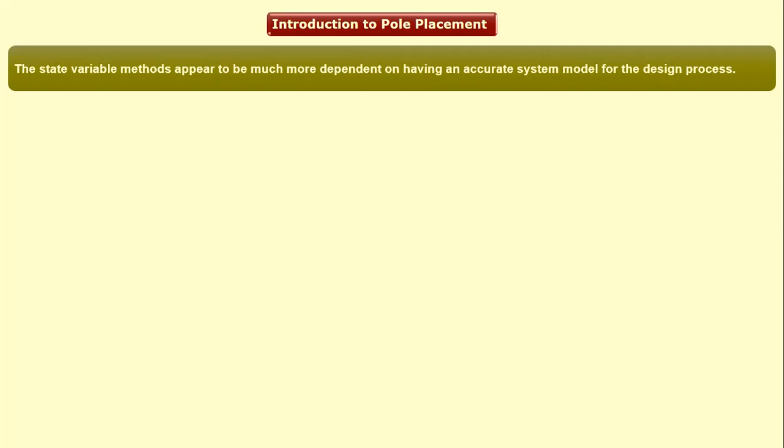Like the state variable method, basically, it needs to have the accurate system model. If we want to do analysis through state space, we need to have the accurate system model, because we are talking about the states of the system. We need to know the state of the system, every state of the system. So to have that, we need to have the accurate system model.

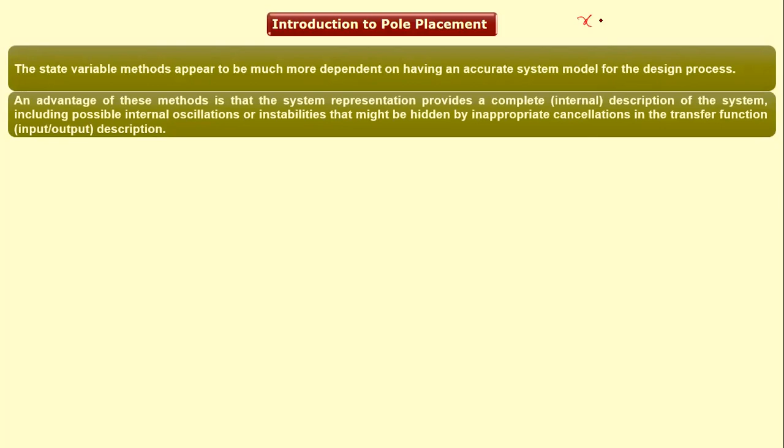Now, the advantage of state space approach or state variable method is that it depends upon the state of the system. Like for any given discrete time system, the state equation can be written as x(k+1) = Fx(k) + Gu(k), and the output equation can be written as y(k) = Cx(k) + Du(k).

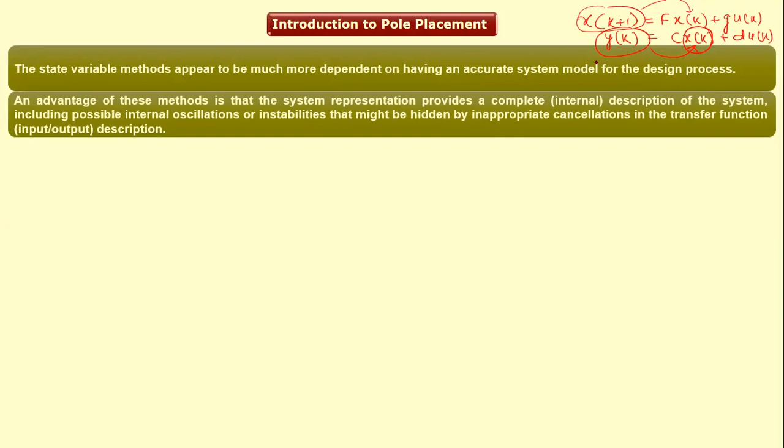So in this equation, if you see, the output of the system depends upon the state of the system. State, in a layman's statement, is the internal description of the system. So if we do analysis of a given system through state space approach or through state variable method, because the output, or the dynamics of the system, depends upon the state of the system, that means a state variable method gives us a representation, or insight, of the internal description of the system.

Now, when we design the controllers using state variable technique, the most important point about this technique is that we can use state variable method to design the controller for a MIMO system. It is very convenient and easy to use a state variable method to design a controller for a multi-variable system, or multiple input, multiple output system.

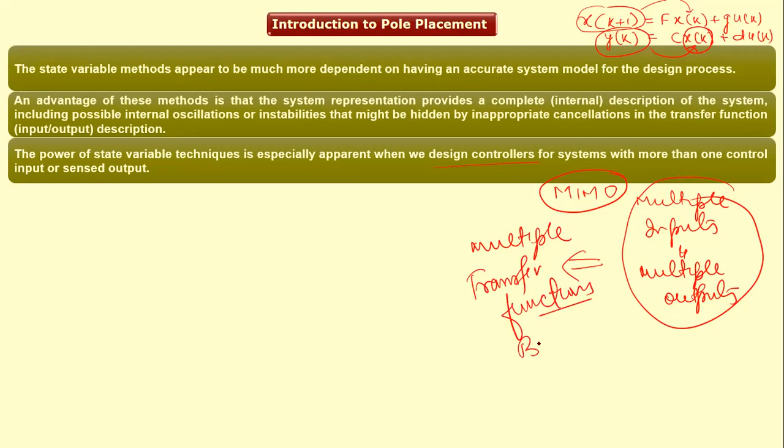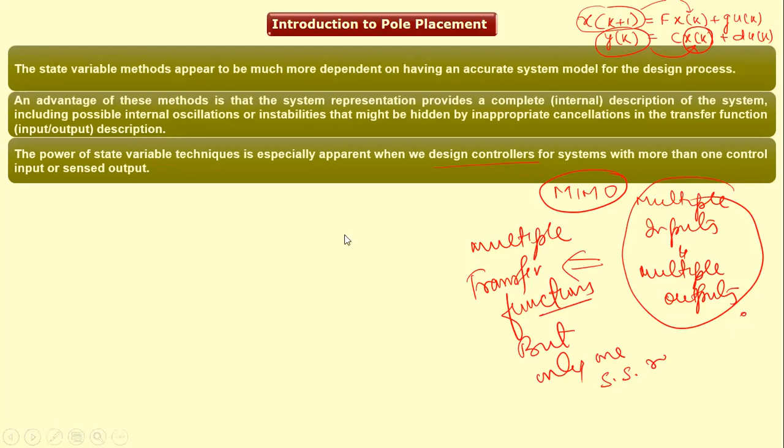If we compare this with the transfer function approach, if we have multiple inputs and multiple outputs, we will be having multiple transfer functions. But there will be only one state space representation, and that is why this method is more convenient as compared to transfer function approach as far as multivariable systems are concerned.

So in this particular chapter, we will understand how we can design the control system or the controller for a state space model using the pole placement technique or pole assignment technique.

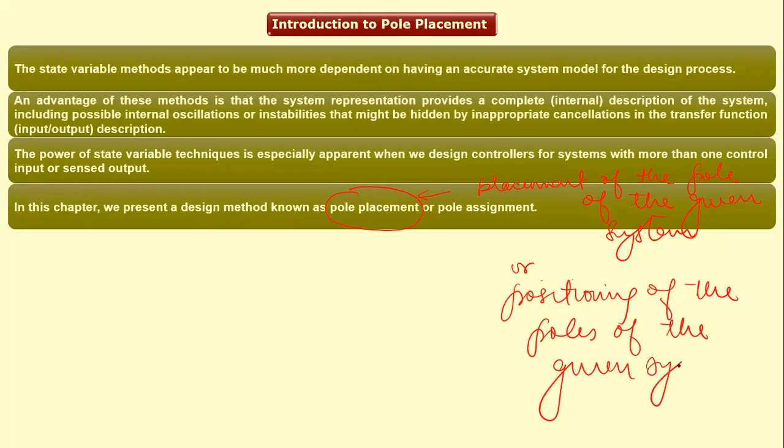Now, what is pole placement? As you can make out from this word, it is the placement of the poles of the given system, or you can say positioning of the poles of the given system. This particular method is almost similar to the root locus method.

In root locus method, we can design the controller using root locus method also, wherein we can have the preferred or desired locations of the closed loop poles. However, in pole placement technique, we can position all the closed loop poles of the system at the desired locations. However, in root locus method, only the dominant poles are placed at the desired location.

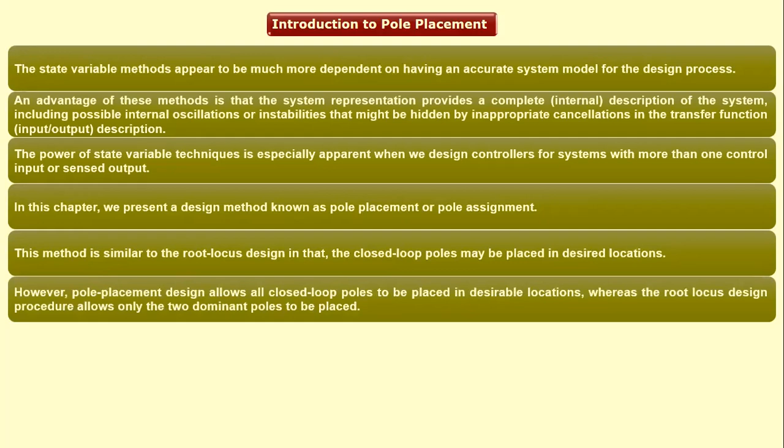Now, if we want all the closed loop poles to be placed at the desired location, in that case, we need to measure all the states of the system. We need to have the information about all the states of the system.

So what is pole placement method? A pole placement method is basically a method which is used to design the control system or controller so that the closed loop poles of the plant or the system can be positioned, can be located at the desired location in the S-plane as far as continuous time systems are concerned, and in the Z-plane as far as discrete time systems are concerned. So pole placement means the placement of poles of the system - closed loop poles.

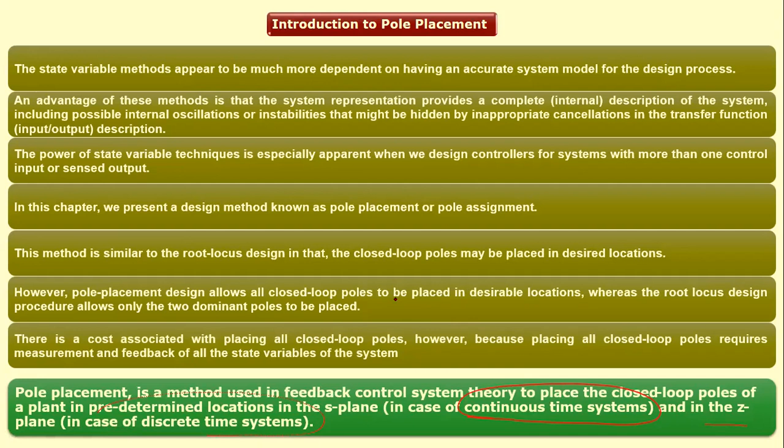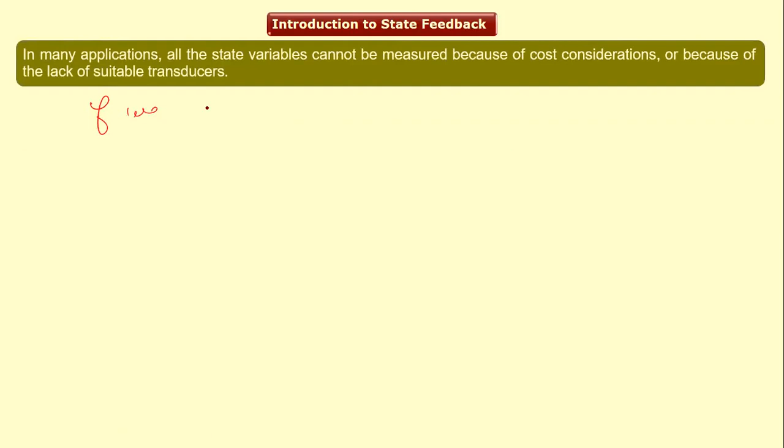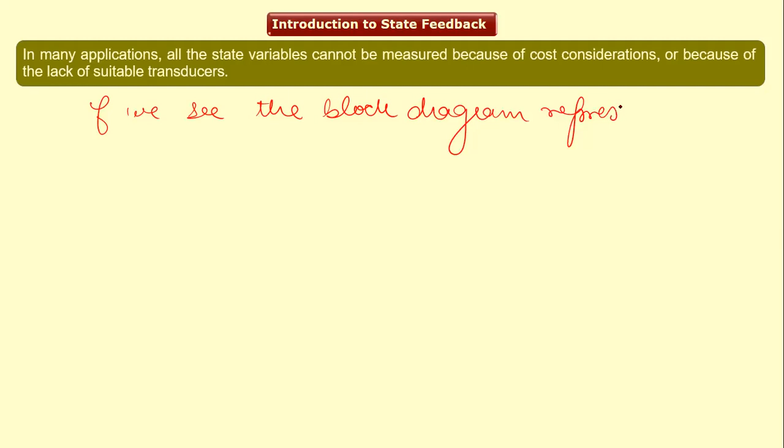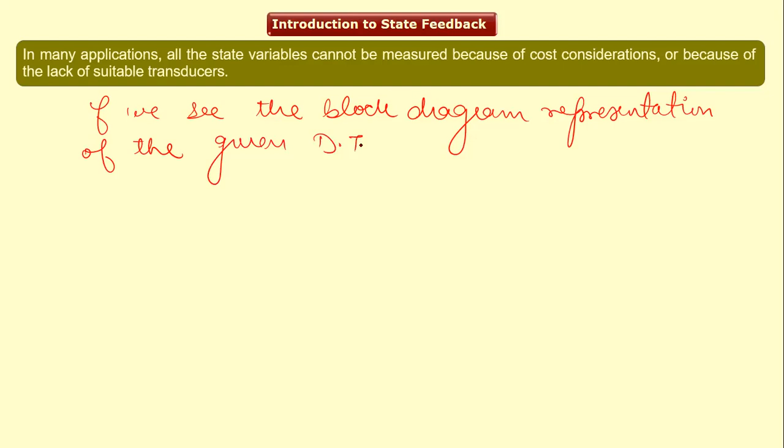Now then, what is state feedback? If we see the block diagram representation of the given discrete time system, it is given by x(k+1) = Fx(k) + Gu(k), and the output is given by y(k) = Cx(k) + Du(k).

Now if we represent this through a block diagram, we have a delay element. The output of this is xk, and input here is xk plus 1. We feedback the state by multiplying this with matrix F, then we have a summing point here, and we multiply G here with uk. Then we multiply uk with D and xk with C, and add them to get the output yk. So this is the block diagram representation.

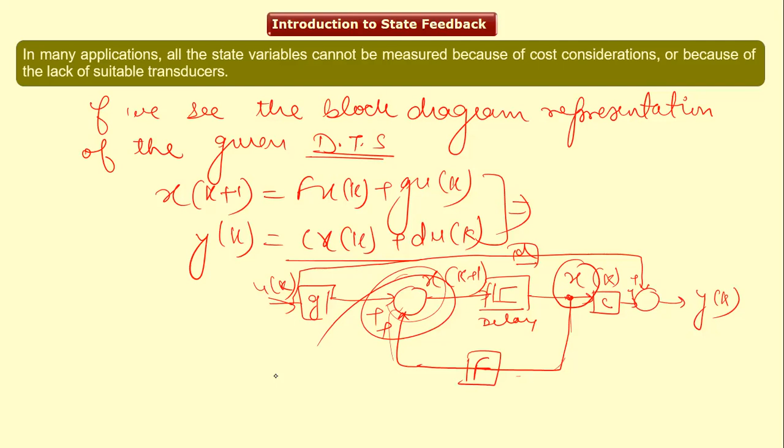Now if we see, we are feeding the state of the system back to the summing point. This is one basic thing, but we have some amendments, some modifications in this particular type of representation, so that we can have the desired locations of the closed loop poles of the given system.

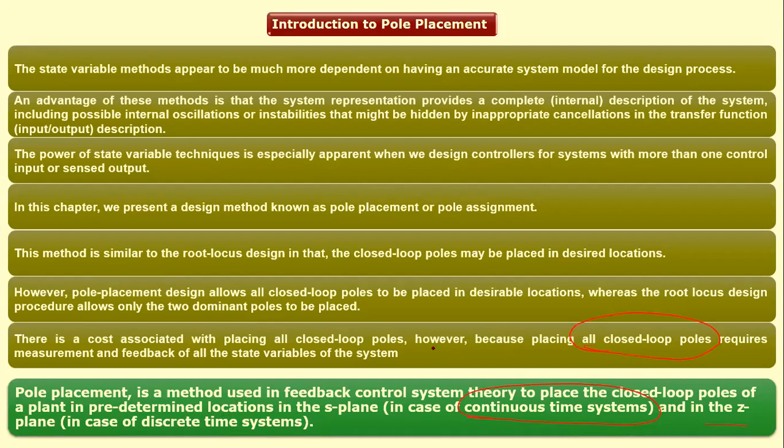So now, we need to locate all the closed loop poles on the desired locations in the Z plane in case of discrete time system.

Now, if we want to do this, we need to measure all the state variables of the given system. However, all the state variables of the system cannot be measured. There are various reasons behind it.

The reason is that if we want to measure every state of the system, we need to include more sophisticated measuring instruments, and the cost will increase. Also, we do not have the suitable transducers which can measure all the state variables of the system.

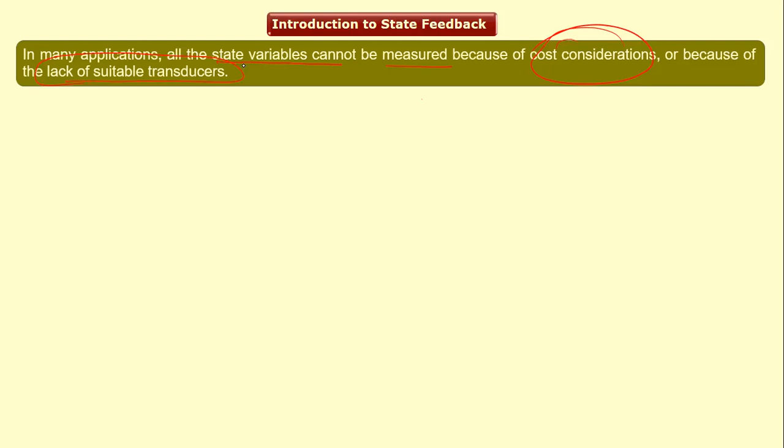Now in these cases, what do we do? Those state variables which we cannot measure need to be estimated. We can estimate from the behavior of the available states of the system the rest of the states which we cannot measure.

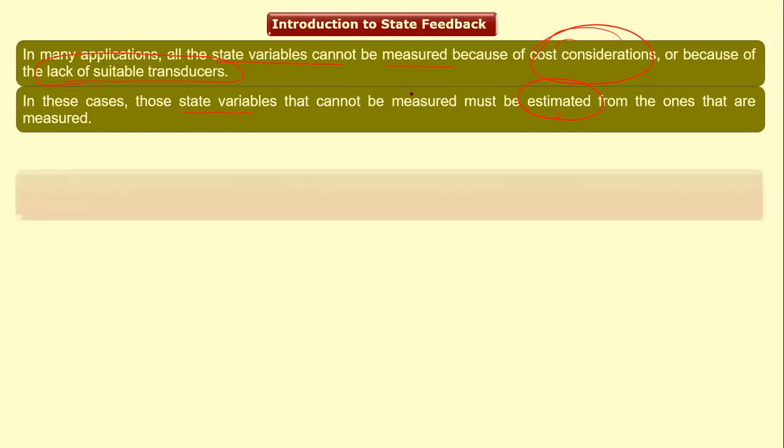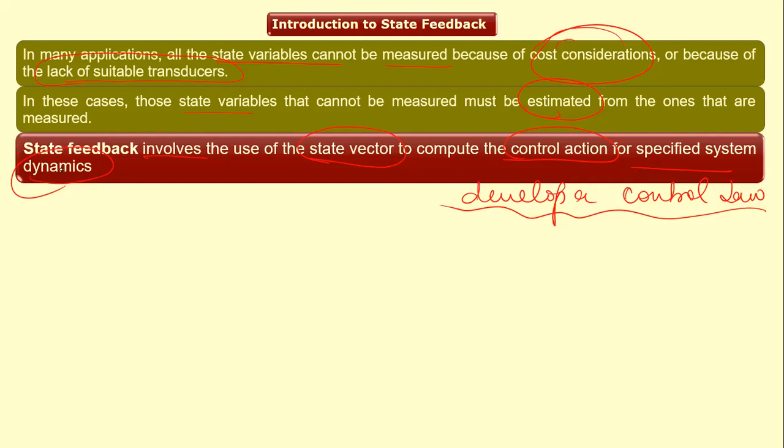Now, what is state feedback? State feedback is a method which involves the use of state vector so that we can compute a control action, or develop a control law for specified system dynamics. For a specific type of dynamics of the system, we can develop a state vector so that we can have a control law, or a controller for such type of system.

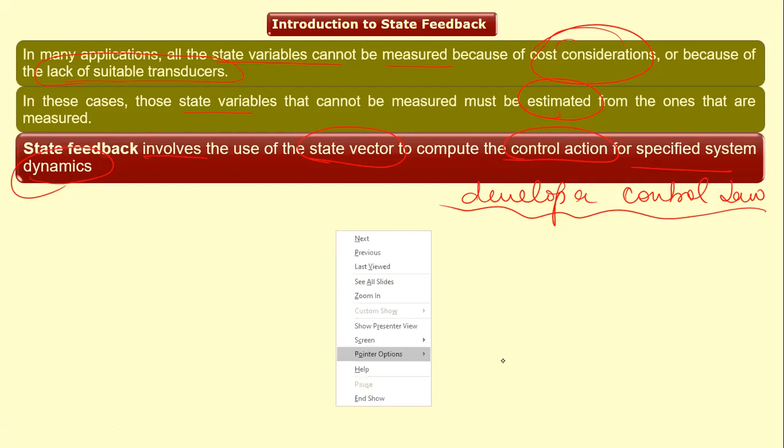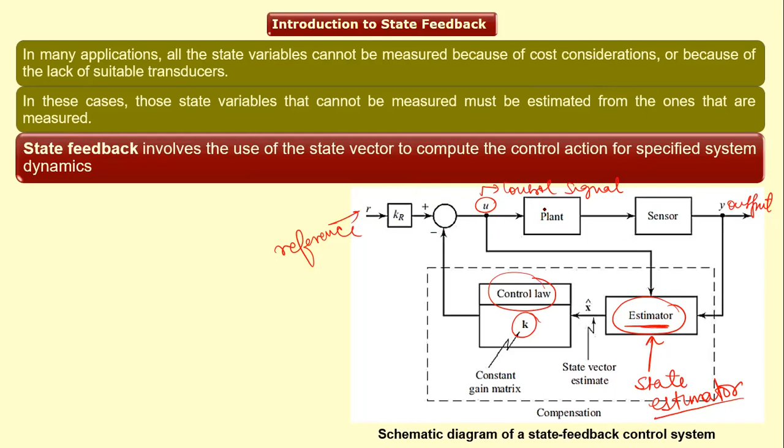So what do we have? We have a reference, we have a control signal, we have an output, we have an estimator. This is the very important part of the system. Then we develop a control law for this type of system based on the output or feedback given by the estimator. Compare the controller's output with the reference, and then we have a control signal. So this is how the state feedback control system works.

Now, how can we improve the stability of a system using state feedback? For any feedback system, the important aspect is that the stability of the control system needs to be ensured. The primary function is to make the system stable. This is one of the primary functions. There are various functions or objectives of a controller or control system, however, the primary function is to ensure stability.

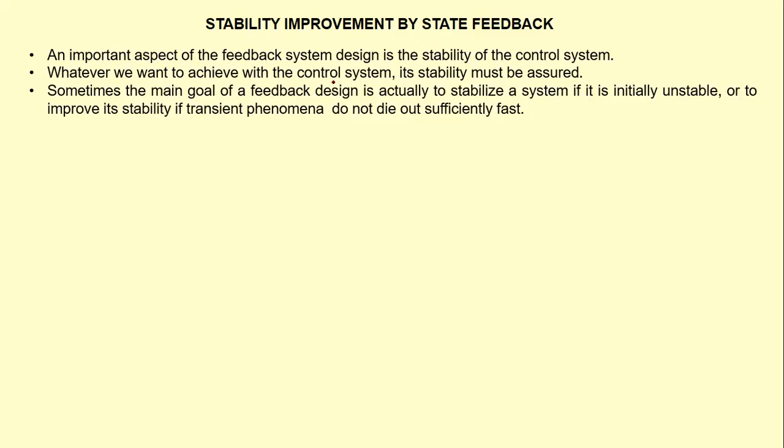Now, if we want to achieve stability through a control system, its stability should be assured. At times, while designing the feedback control system, our actual objective is to stabilize a system if it is initially unstable, or if it is initially stable, we can improve its stability or transient response. That means if our system is already open loop stable, we can improve the transient characteristics, steady state characteristics, or frequency characteristics of the given system by designing a suitable controller.

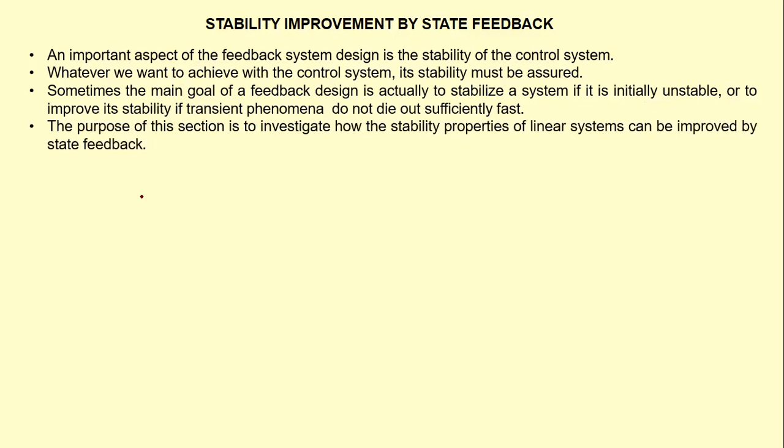Now in this particular section, we'll see how these stability properties of the linear system can be enhanced, can be improved, using state feedback.

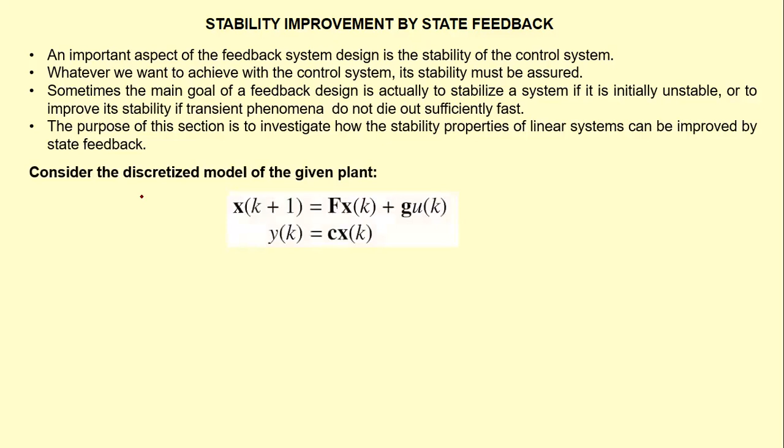Now for this, let us consider a discrete model of the plant, which is given by this equation. Let us say this equation is equation number 1 here, and we have all the matrices here. F is the state matrix, this is the input matrix, this is the output matrix.

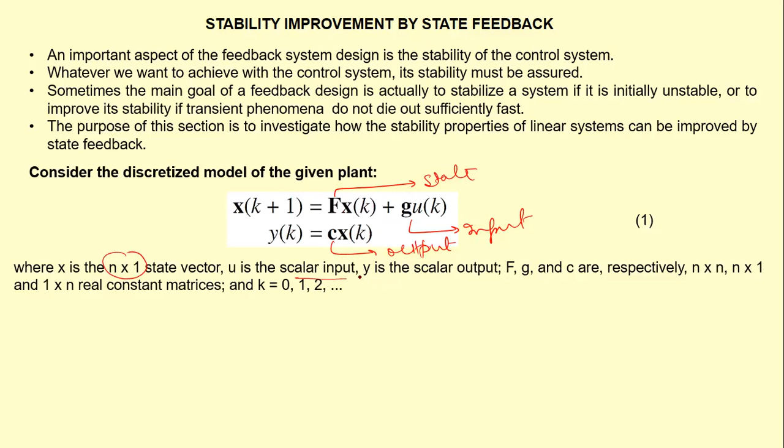xk is basically a state vector, uk is the scalar input, and yk is a scalar output. So this is a SISO system, right?

So now the design of the controller for the plant given by equation number 1 can be done in two steps. The first step is that we assume we have all the elements of the state vector at our disposal for feedback purposes, meaning we have measured all the state variables.

The next step is that we can design a state observer which can estimate the entire state vector.

This is what we have to do, because if we want all the closed loop poles of the given system to be placed at preferred locations in the Z plane, we must have all the state variables of the system. However, it is practically not possible to measure all the state variables of the system.

In that case, what do we do? We design the state observer, which acts as an estimator and estimates the entire state vector of the system.

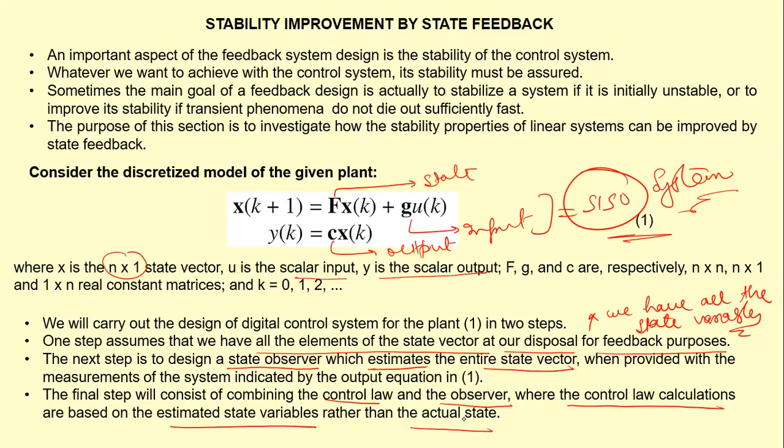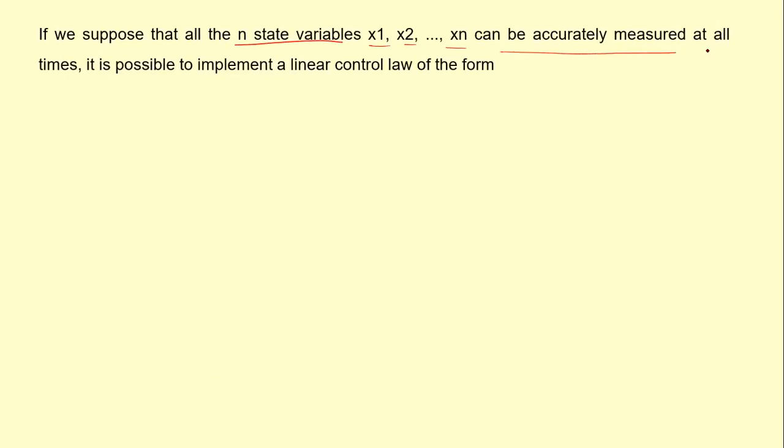If we suppose that all the n state variables, x1, x2, up to xn, can be accurately measured at all times, it is possible to implement a linear control law, given by uk equals minus k xk.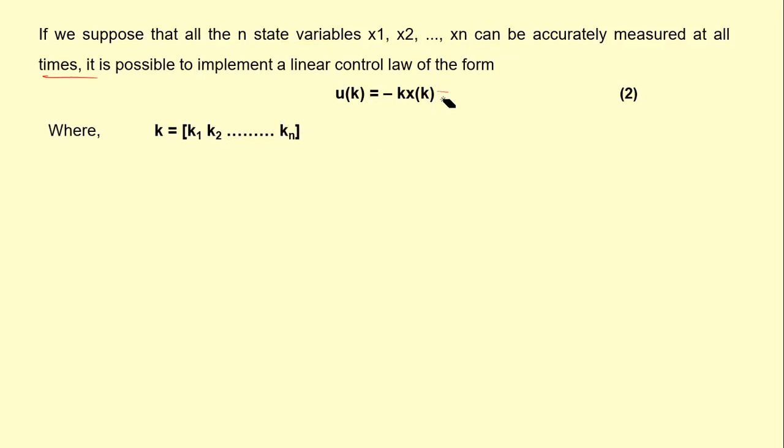What is this? This is the control signal. So we can have a control signal based on this particular criteria, that is minus k xk, where k is basically a matrix containing elements k1, k2, up to kn.

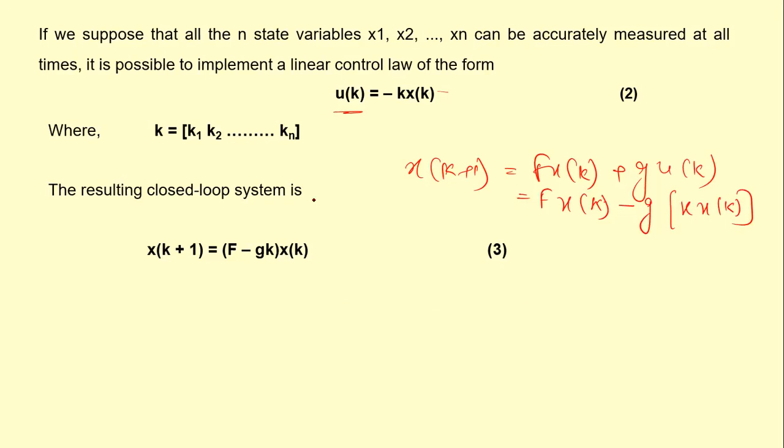Now, the resulting equation: if we substitute uk into xk+1 equals f xk plus g uk, we get f xk minus g k xk. So this gives us this equation.

Now, the eigenvalues of this matrix f minus gk are actually the closed loop poles of the system. If all the eigenvalues of this particular matrix are placed inside the unit circle of the complex Z plane...

...then the state xk will decay to the equilibrium state x equals 0, irrespective of the value of x0, that is the initial perturbations of the state. This means that if we can find a control law such that the eigenvalues of this matrix, that is all the closed loop poles, can be placed within the unit circle, then the state xk will decay to equilibrium x equals 0, irrespective of initial perturbations, disturbances, or uncertainties. Eventually the state of the system will converge to the equilibrium state.

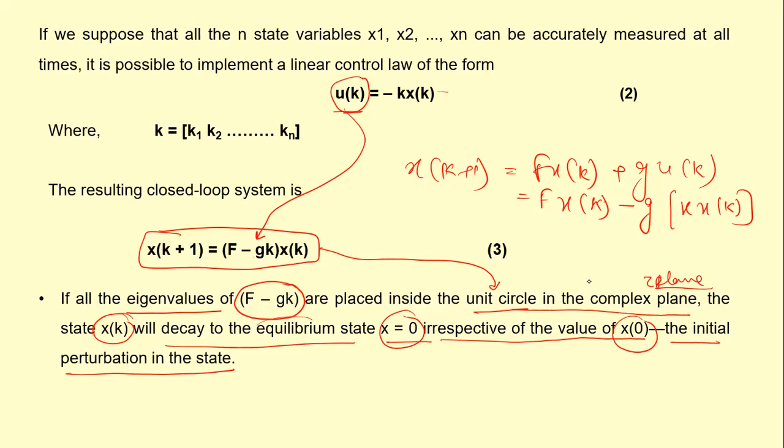Now, what are the necessary and sufficient conditions for arbitrary pole placement? A necessary and sufficient condition for arbitrary pole placement of closed loop eigenvalues, with the restriction that complex eigenvalues occur in conjugate pairs—we can have complex poles, but they should occur as conjugate pairs.

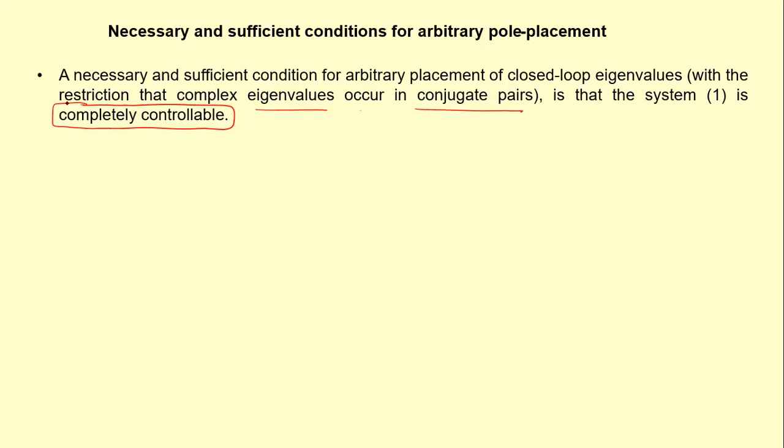So the necessary and sufficient condition is that the given system should be completely controllable. If it is completely controllable, only then can we design a control law uk equals minus k xk. If our system is not completely controllable, we cannot have the required controller.

And what is the definition of completely controllable? If all the initial states of the system are controllable, we can say the system is completely controllable. For this, you need to study the controllability of the system.

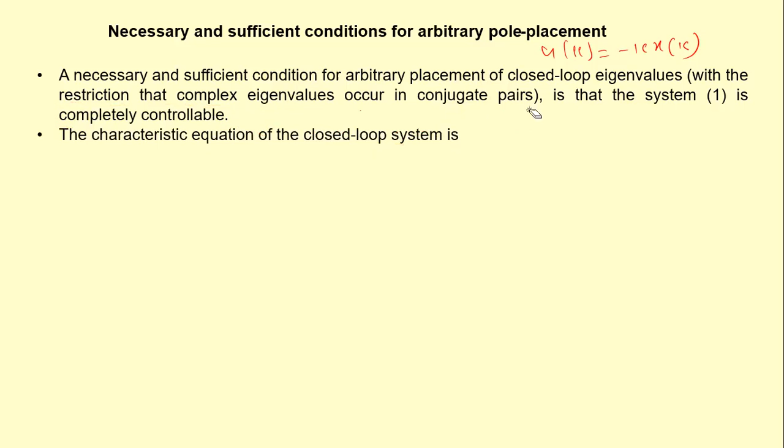Now the characteristic equation here will be: we have F minus GK. The characteristic equation will be zI minus F minus GK equal to 0. This is the characteristic equation.

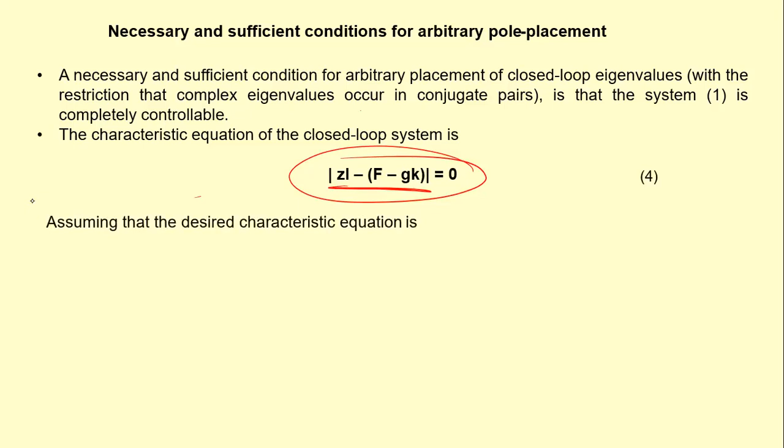This is equation number 4. Now if we assume that the desired characteristic equation is this one, we can get the values of K by matching the coefficients of these two equations. We have the actual closed loop equation, and the desired closed loop equation. Then we can compare these two equations to get the values of K.

Now the calculation of the gains using this method becomes rather tedious when the order of the system is greater than 3. For higher order systems it becomes very difficult to use this approach. First we need the F minus GK matrix. Then we need zI minus F minus GK, put it equal to 0, obtain its coefficients, and compare it with the desired equation to find the values of K1, K2, K3, K4 up till Kn. For higher order systems it is quite difficult, not impossible, but it involves a lot of calculations.

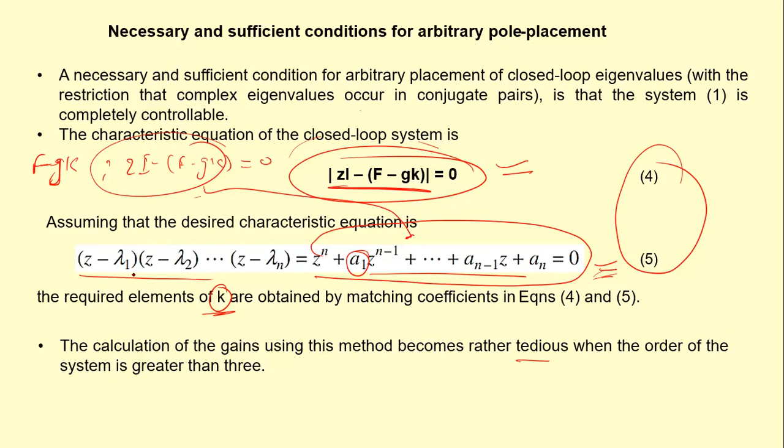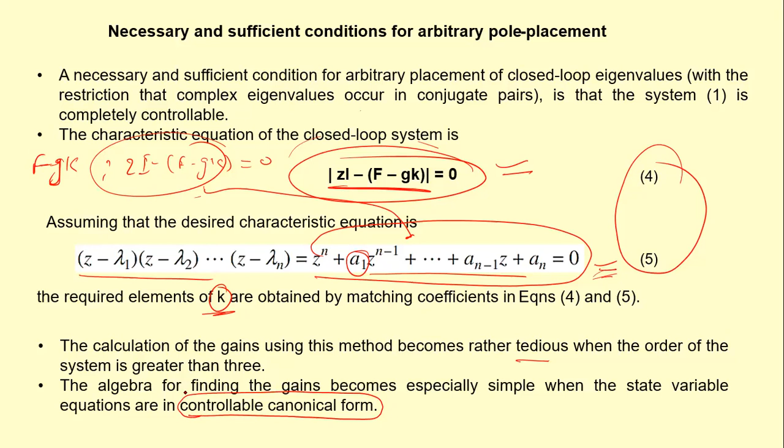So what we do is we have a standard procedure. The algebra for finding the gains becomes especially simple when the state variable equations are in controllable canonical form. That means we can convert our state variables into the controllable canonical form, in which case it would be very easy for us to have the gains K1, K2, K3, K4, K5 and so on. So how do we design the state regulator?

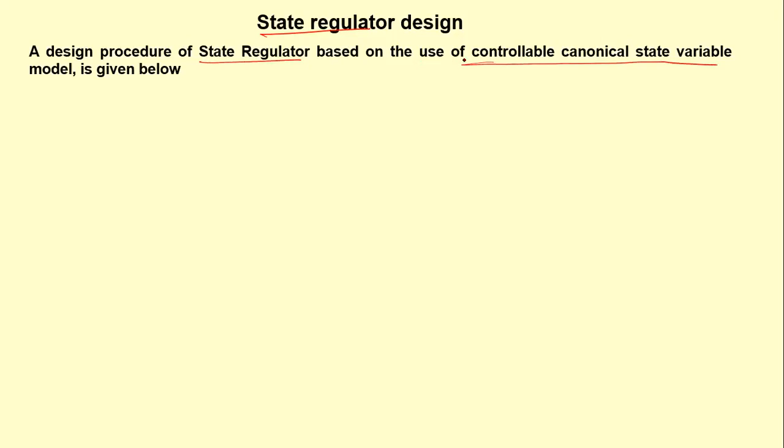Now from the characteristic polynomial, this is the characteristic polynomial, not the characteristic equation. So from this polynomial we have this equation here, and we can determine the values of alpha 1, alpha 2, and alpha n.

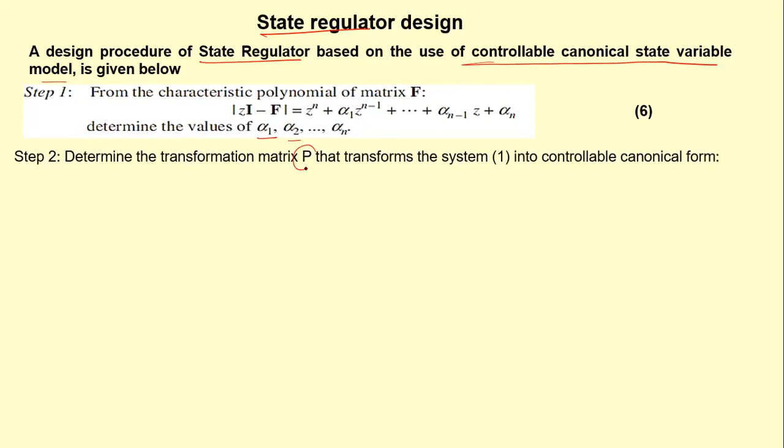And then we can determine a transformation matrix P that transforms the system given by equation 1 into the controllable canonical form. This matrix P is given here, where P1, P1F, and so on, where P1 is 0, 0, 0 up till 1 into the matrix U inverse, and U inverse, where U matrix is the controllability matrix.

This is the controllability matrix. Now using the desired eigenvalues, desired closed loop poles lambda 1, lambda 2, lambda n, we write the desired characteristic polynomial. We have this characteristic polynomial and this characteristic polynomial here, and we can determine the values of alpha 1, alpha 2, alpha n minus 1, alpha n.

And then we can have the matrix K, which is given by this equation here, into P, where P has been obtained. So we need to know an, alpha n, an minus 1, alpha n minus 1, and so on. So this is one approach.

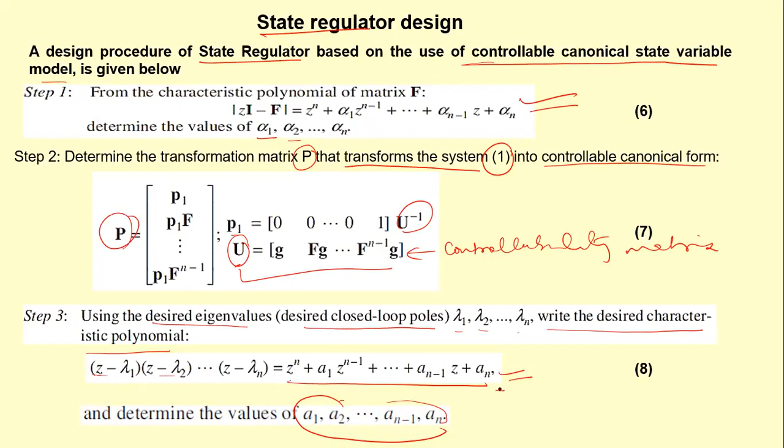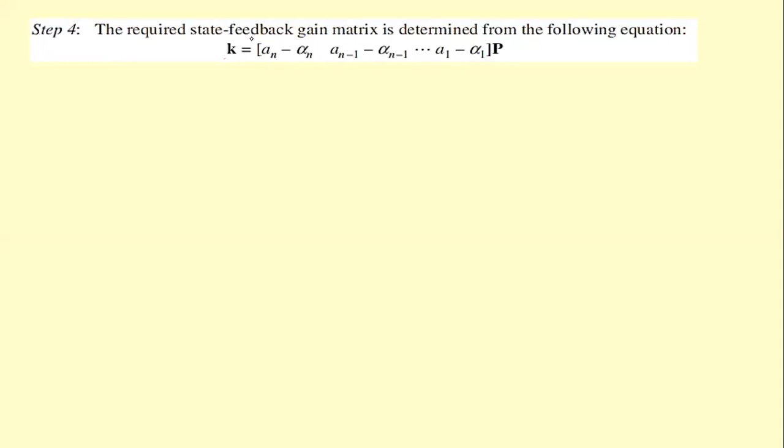So we have 4 steps here. Step 1 is we form the characteristic polynomial matrix. Then we have the P matrix. Then we have the desired characteristic equation. Then we have the state feedback gain matrix K, using this, which is the required state feedback gain matrix. And then there are some other approaches also through which we can determine the state feedback gain matrix K.

So in this lecture we have studied about pole placement, a basic introduction to pole placement, about state feedback, how the state regulator is designed, and what is the necessary and sufficient condition for pole placement.